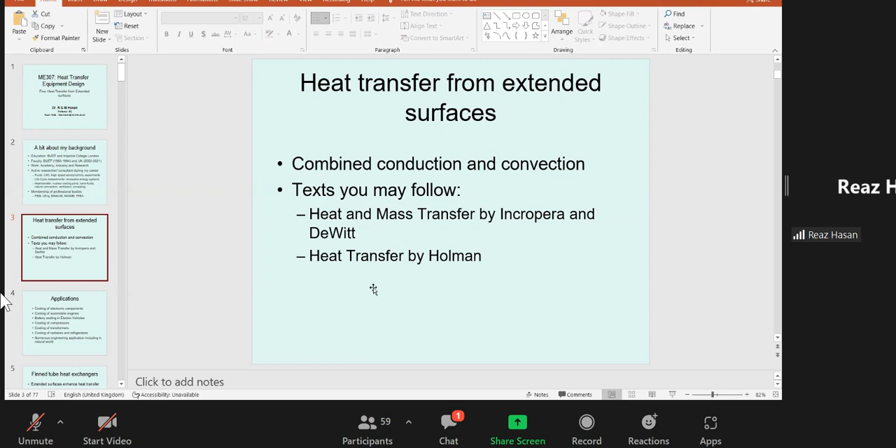আমরা বলেছি যে we will probably spend most of our time about heat transfer from extended surfaces, which means the fins। আমি মোস্টলি হলম্যানের বইটাই ফলো করেছি, বাট ইউ ক্যান ফাইন্ড দিস থিংস ইন এনি টেক্সট বুকস। অ্যাপ্লিকেশনস আর মেনি এবং দিস আর পসিবলি দি নাইসেস্ট এক্সাম্পলস। এবং আজকে আমরা সত্যি সত্যি কিছুটা ক্যালকুলেশন করব ইনভলভিং দিস কাইন্ড অফ প্রবলেম।

So fins are everywhere. Any heat transfer device will possibly have some sort of fins attached to it। আমি রেকর্ডিংটা শুরু করে দিই, তাহলে পরে যদি সময় হয় আমি আপলোড করব, but it all depends on the situation।

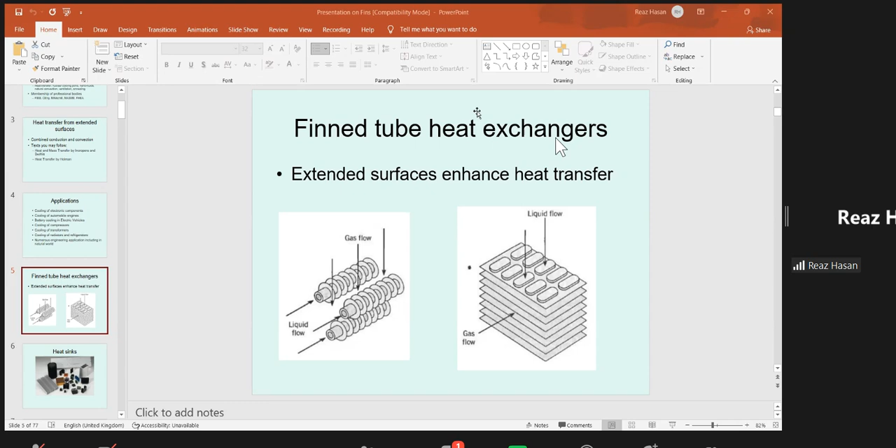Recording in progress. So finned tube heat exchangers are very common. When you go to the laboratory, I would ask you to take a closer look at the things and see whether the fins exist or not. But they are really a common kind of attachment or extension to the design of heat transfer systems.

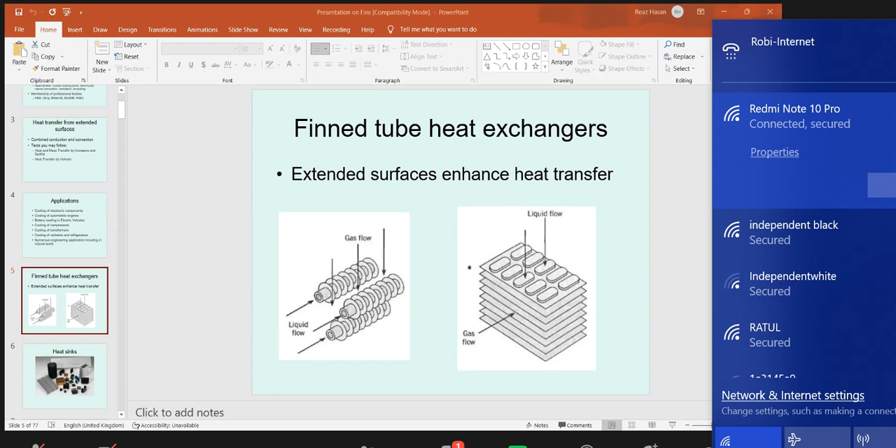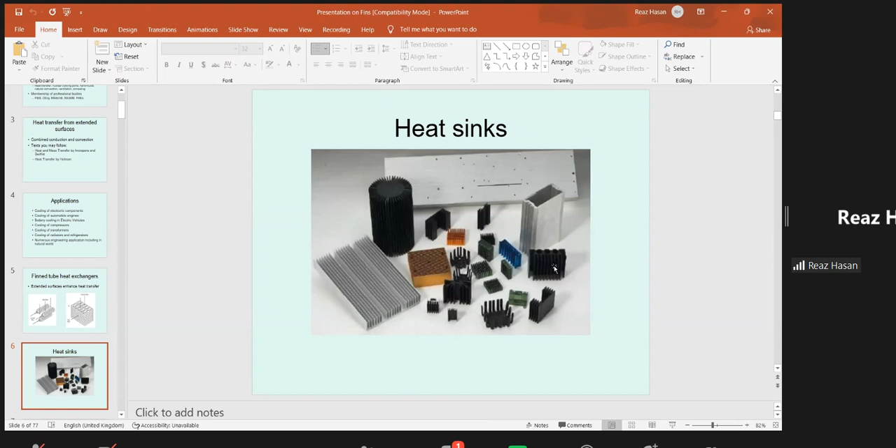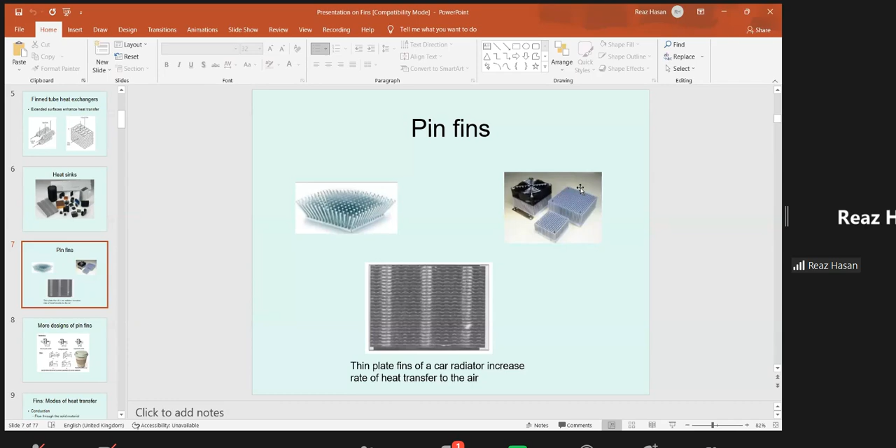On the other hand, the pin fins are like that. It's a protruding pin that can be of uniform cross section, that can be conical, that can be of other different shapes. This is again an interesting thing.

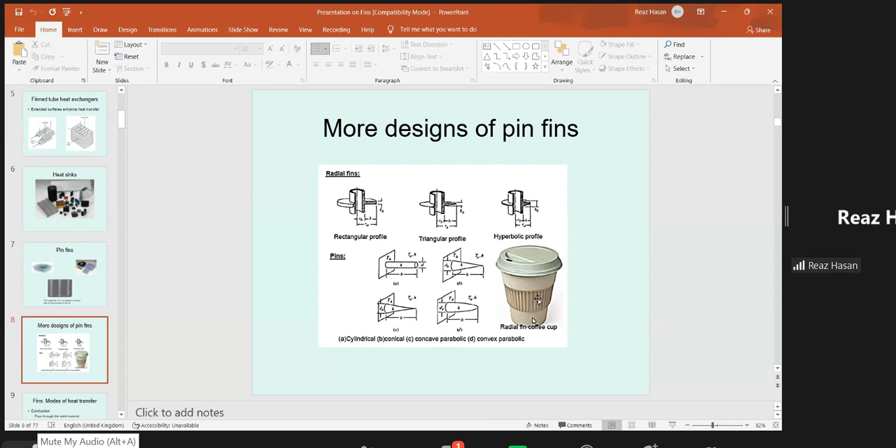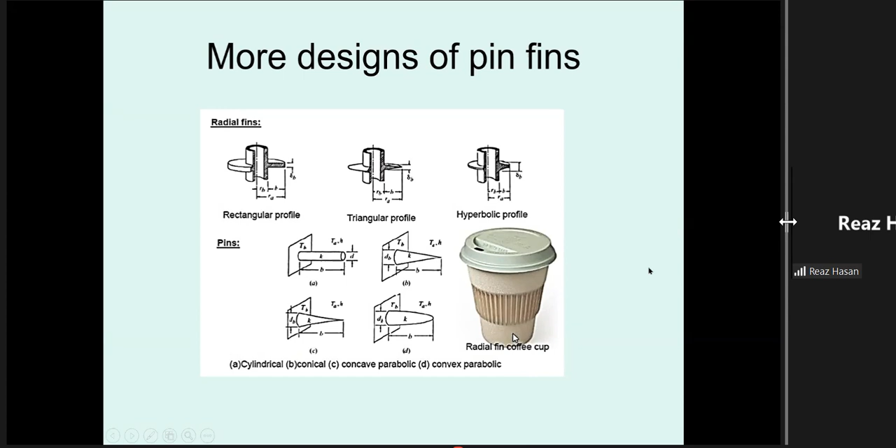So what I wanted to say is when you take a heated cup of coffee or tea, if you hold it at this area you will feel it is very hot. On the other hand, if you feel here, it is much more easier to hold, and at the same time, since it is losing heat, obviously you will feel less hot. Plus, another thing of course, just the very design allows you some space in between the two solid surfaces. So these are again the designer aspects.

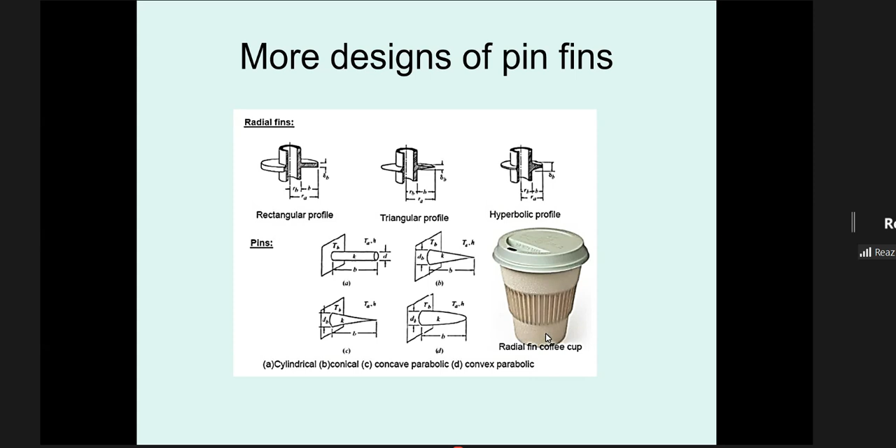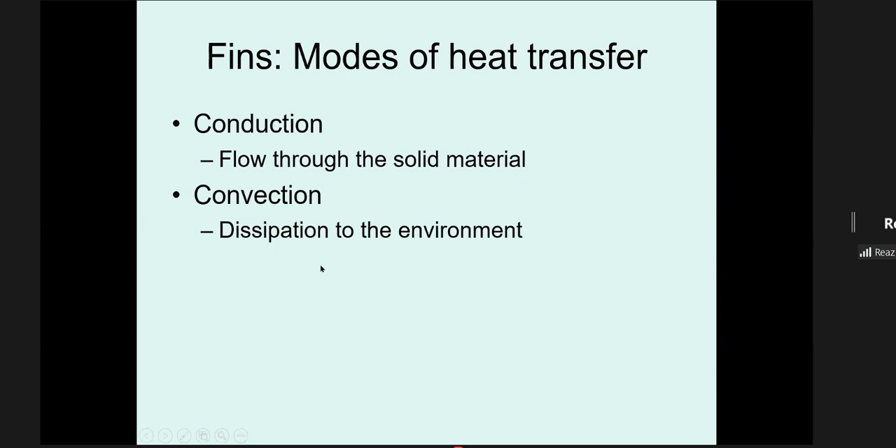So we saw that fins actually represent a combined mode of heat transfer. Here conduction is present, convection is present. Obviously the first bit will be conduction, and all convection actually starts from conduction, which I think you are familiar with from your previous heat transfer course. So it is much more obvious that the majority of the heat that flows from the solid material is via conduction, and then due to the fact that the surface is exposed to the environment, it will start losing heat by convection. So it's a combined mode of heat transfer.

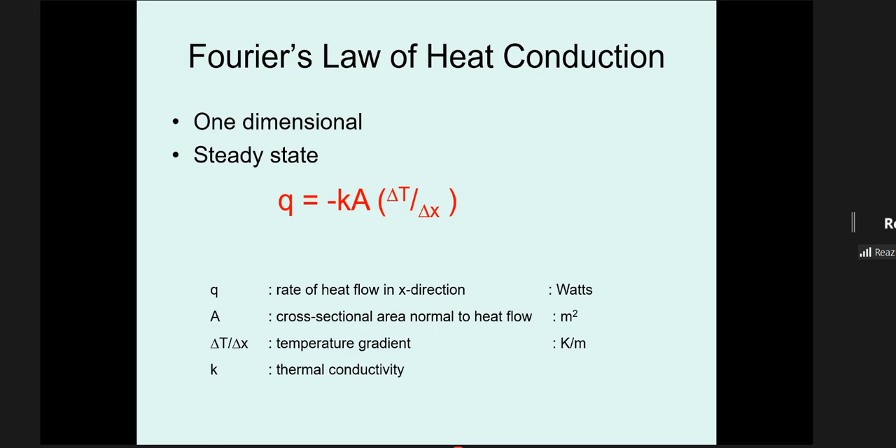In this discussion I just took you through all this basic stuff, so there is really no need to dwell on it if you are more comfortable, but I gave all these things as a matter of completeness. So we can quickly move past these things, there is no need to spend too much time on it.

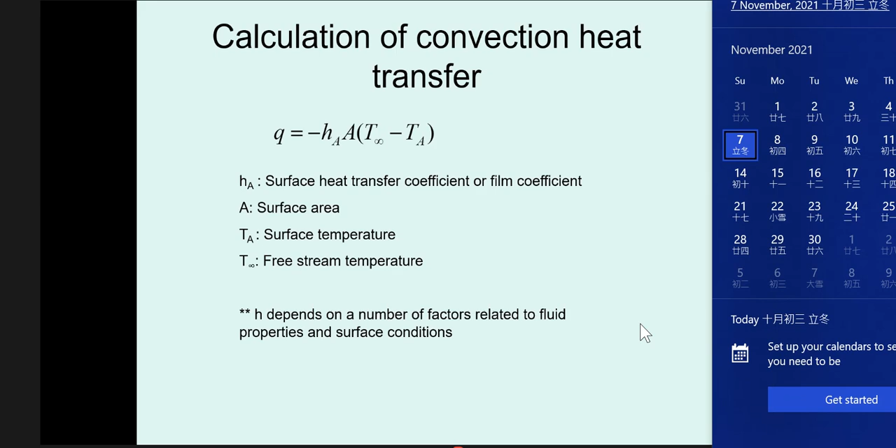And for convection, we discussed that this is basically the equation Q equals H A delta T. And H is the tricky quantity because it is the heat transfer coefficient. I already mentioned to you last week, and I will possibly reiterate a few times in my next classes, that the value of H is very tricky because it depends on so many factors. I showed you a little video last week, and there are plenty available on YouTube and various other places. So H is a tricky quantity, but for the sake of our calculations or all the problems we'll be following, we'll take a given value of H.

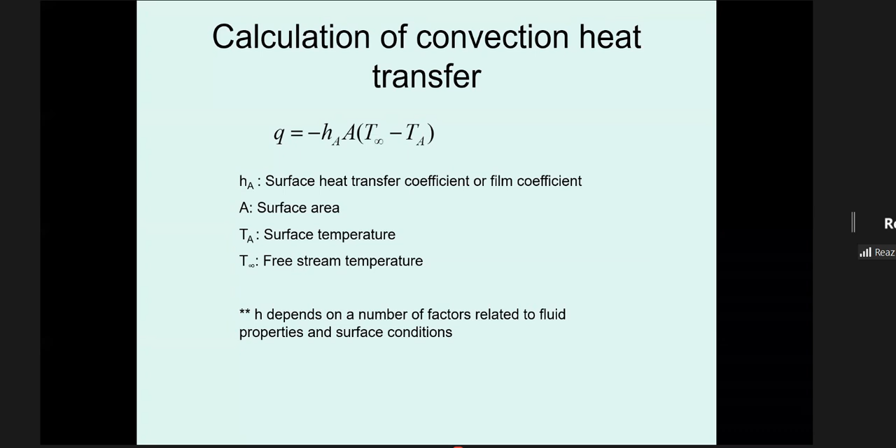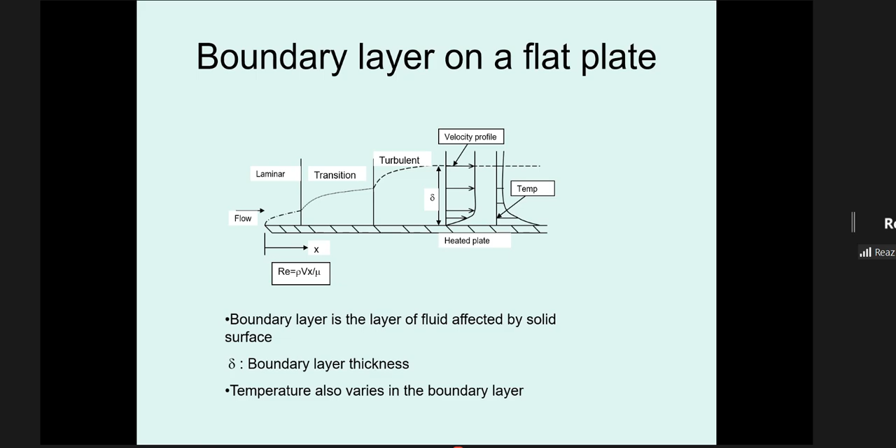And the reason the value of H is a little bit uncertain or tricky to find out is because of the boundary layer which exists very close to the solid surface, and lots of things happen there, and obviously H suffers from a big range of uncertainty. Then we talked about these numbers you are all familiar with: Nusselt number is related to the H value, which is the heat transfer coefficient, and Prandtl number is a ratio of three properties of the fluid in question. Reynolds number, on the other hand, tells us the ratio between inertia force over viscous force. So I think you are all familiar with such things.

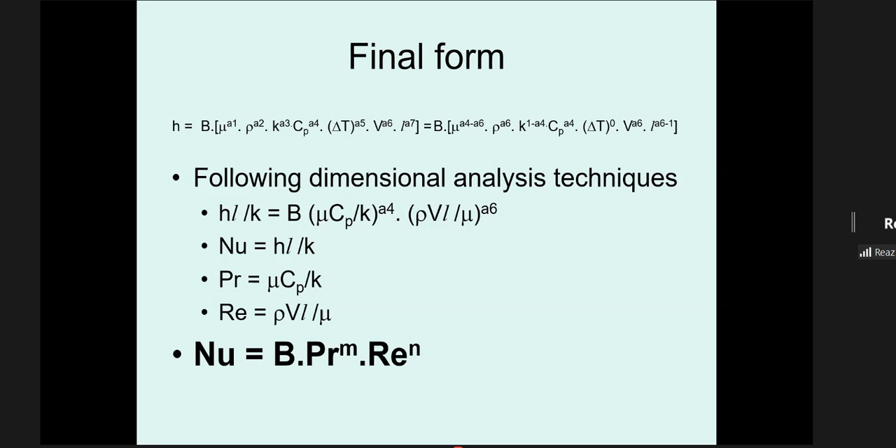And then I gave you one or two examples to try, which I'm sure you should do before next week.

But again, this can also happen to a natural convection scenario. For the case of fins, perhaps natural and forced convection are both equally common, though if I'm correct, natural convection is probably more common, but the other one is also there. In natural convection, basically you've got a heated object and the fluid around it gets heated, and then it flows naturally upward, setting up a flow regime which takes the heat away from the heated surfaces.

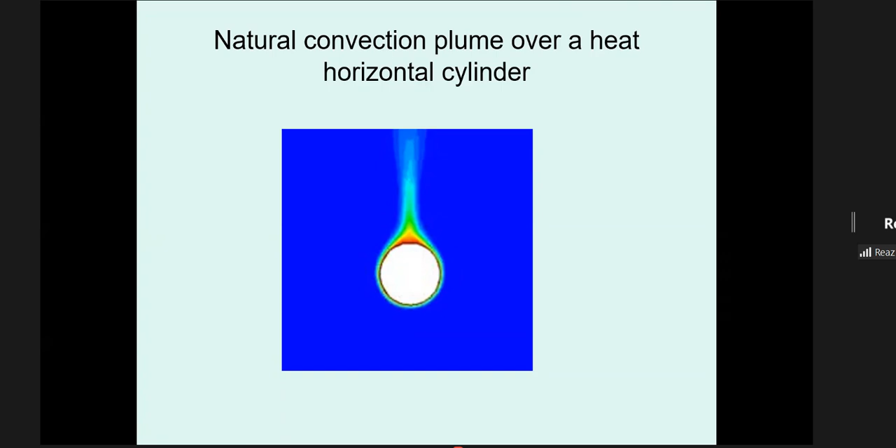The analysis is very similar - we can think about a boundary layer along a vertical wall, and again you come up with a Nusselt number relation. So the Nusselt number and Prandtl number are the same; the only thing different is the Grashof number, which is a little bit messy kind of expression, but this is how it is defined. After we know the Nusselt number, we know the value of H, and then we can solve the conduction-convection problem.

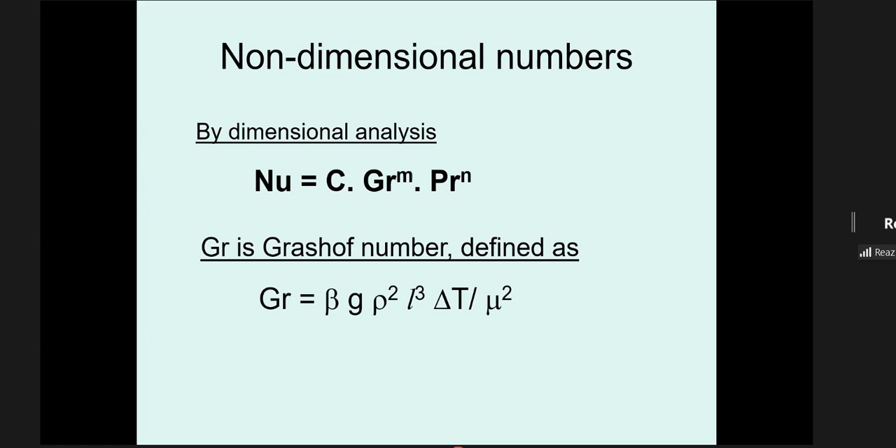One of the best examples is perhaps fins. I gave you a few problems. This is what I suggest to everybody: when you take a heat transfer problem, first look at the problem and then see how you can approach it.

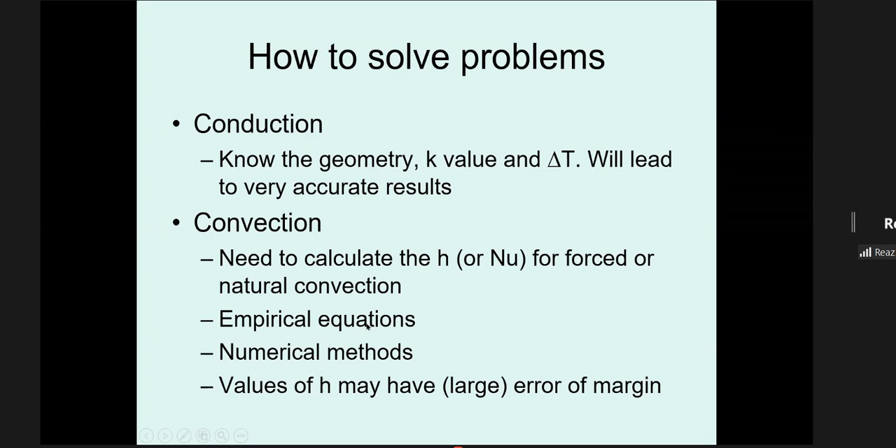In the context of conduction and convection, if you know the geometry, the K value, and the delta T, you can get very accurate results, perhaps exactly the same as what you get in an experiment, whether you do a theoretical or numerical analysis. On the other hand, if you're doing a convection analysis, things can be very different - empirical equations are used and the values of H may have a large margin of error.

So this is what we discussed last week, that this is a standard way of starting the analysis of fins. Here what we have taken - let me see if I can get a better annotation for you.

If I go there. No, I think... I was doing the color. No, I think I better stay with this.

So this is the base metal, base material, which is at a temperature, can be any temperature T0, I've written TB. This is a rectangular fin which is protruding from the surface. At the same time, this is a similar one, but in this case we are considering a circular cross-section, uniform cross-section fin. Here we need to understand that there is a convection environment on top of it.

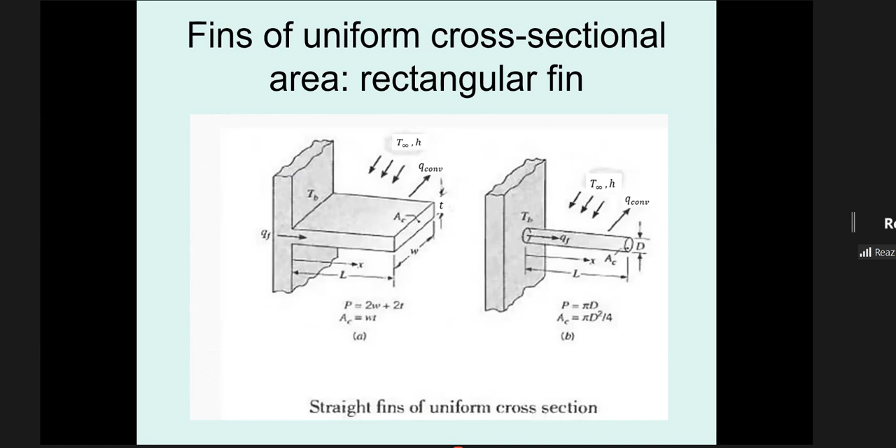We discussed that we can consider it one-dimensional if the depth is very high. One thing to highlight: if there was only conduction - say this is the fin - if it was only conduction, meaning no heat loss by convection, then it would have been a straight linear profile. But the fact that as soon as it comes here there is some loss, dT/dx is not constant, and in fact it decreases. So clearly this makes things a little bit more complicated.

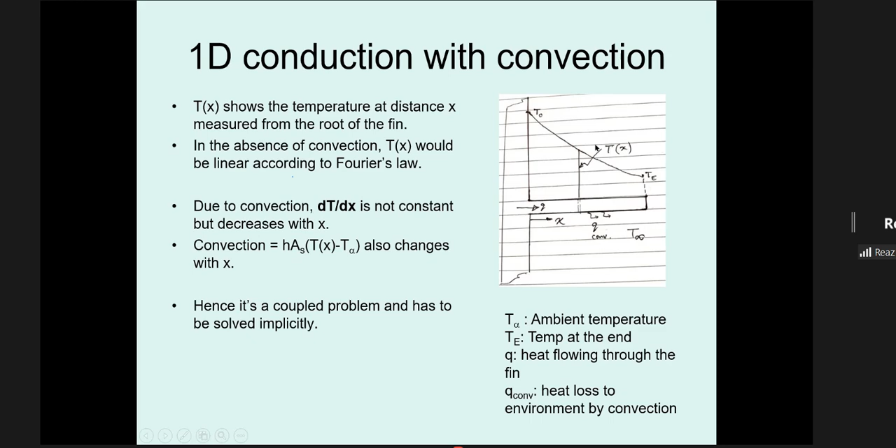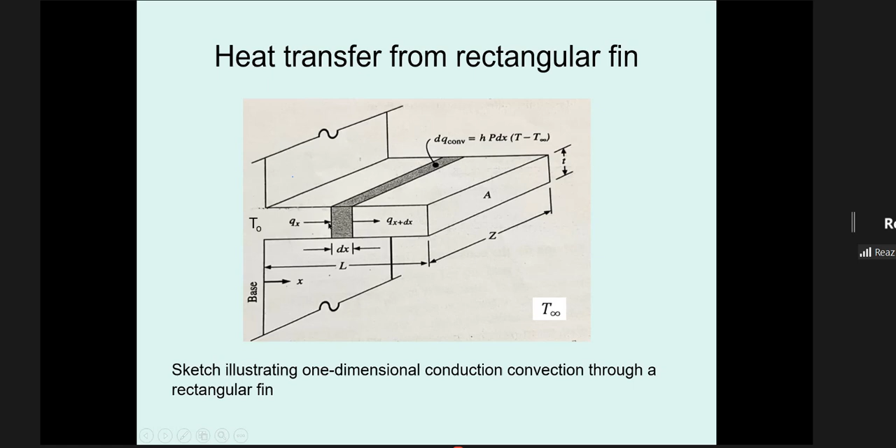And then this is what we did: you take a small elemental area which you are very familiar with, and we say the base temperature is T0, and we take an element at a distance x measured from the base, and this is dx. So our infinitesimal area is P times dx, where P is the perimeter of this area. So P times dx is the area of heat transfer by convection, so dq convection is given as h times area times delta T. And if we consider heat coming in as qx and heat leaving as qx plus dx, then we proceed like that.

So the heat lost by convection is this, and energy in the left face is minus kA dT/dx. That's straightforward, given by Fourier's law of conduction.

The same thing is true. We want to find out the heat lost through the other surface, which is dt/dx at a distance of x plus dx. The way we do it is basically extend it: dt/dx at x plus dx means you write the variable and take the derivative of that times the distance, and then you do that.

Is everyone familiar with this? I hope so, yes. Okay, so the energy lost in convection is this.

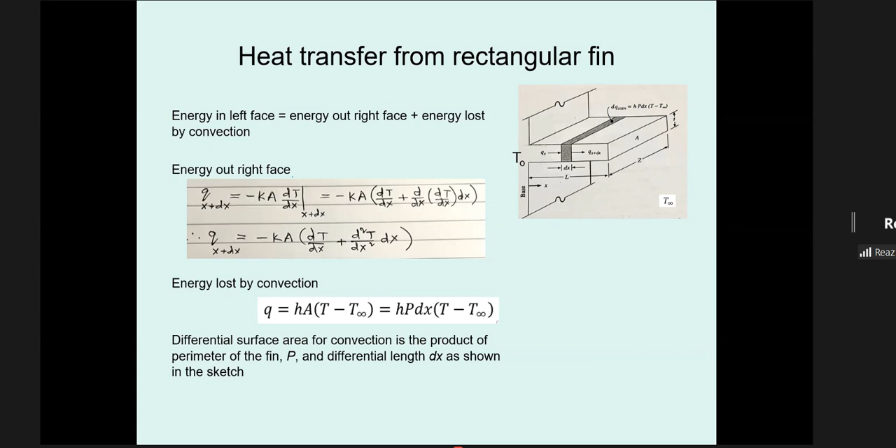Once I'm finished with this, we stop and then start again. Stay on the line. So after that, what we did, we just combined it together, and it needs a bit of doing, and I hope you can do these things very well.

So after combining, you get a second order differential equation in terms of T, which is the temperature. And an interesting quantity that comes up is h times P over kA.

To make it much simpler, what we do is take the excess temperature theta to be equal to T minus T infinity, where T infinity means the temperature of the convection environment or outside environment. So if you put those things in, you can make it even simpler.

I'm sure you are familiar with this kind of second order differential equation. So obviously, since it's a second order differential equation, you need two boundary conditions to solve it.

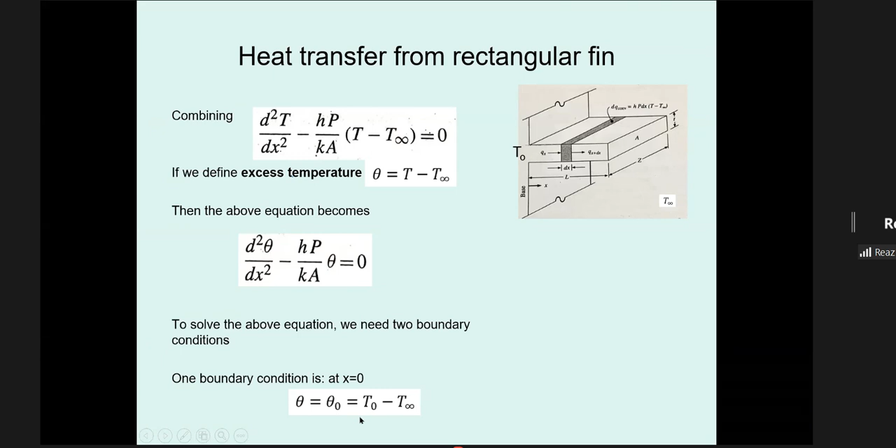One of the boundary conditions is obvious: when you put x equals to 0, which means right at this surface, theta equals theta 0, which is T0 minus T infinity. So that's one of the boundary conditions.

And the next boundary condition can have many different types. I have taken this from Holman, and perhaps these three are normally considered for undergraduate studies.

Case one: we consider the fin to be very, very long, so L tends to infinity, which basically means that at the end, the temperature is the same as T infinity. This is of theoretical interest.

The second case is perhaps more common: the fin is of finite length and it loses heat by convection at the end. I'm sure you agree this is perhaps the most practical kind of scenario.

And the third one is again an interesting one. We are saying that the end of the fin is insulated, so there is no heat loss through the end.

The reason all these three conditions have come up is that when you do mathematical analysis, these three are ones you can typically do. If it becomes too complex, sometimes people have done it, but it becomes a bit more complex. Conceptually it's nothing more complex; it's just that the mathematics, the differential equation solution and expressions, can be a little cumbersome and tedious.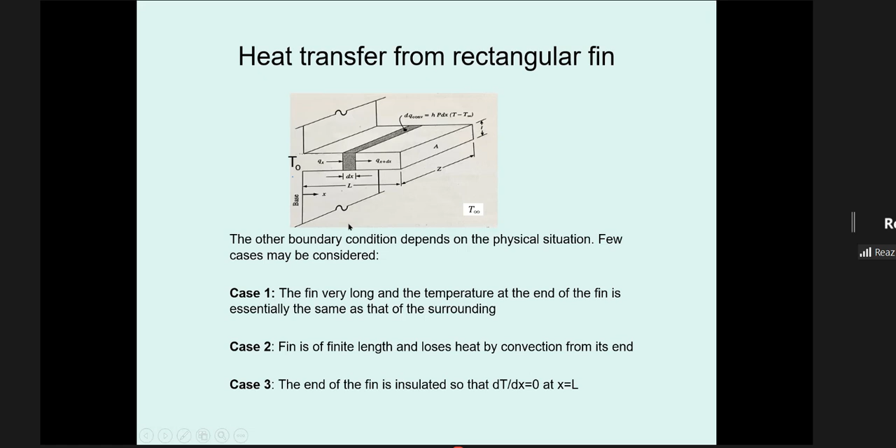The first boundary condition is known: at x equals to 0, you have theta equals theta 0. Now the second boundary condition is that we apply theta equals to 0, because by the time it goes to infinite length, at x equals to infinity, your theta equals to 0.

So you put all those things in and solve it straightforwardly, and you come to this expression: theta over theta 0 is given as e to the power minus mx. And as expected, this is actually giving us the temperature variation over the fin.

I think you are all familiar with the case that when we study heat transfer analysis, if we know the temperature distribution, we can always calculate the heat transfer. Ultimately, for most cases, we are more interested in perhaps the value of the heat transfer. We are also interested in the temperature, obviously, but perhaps Q becomes the more important thing to determine in many cases.

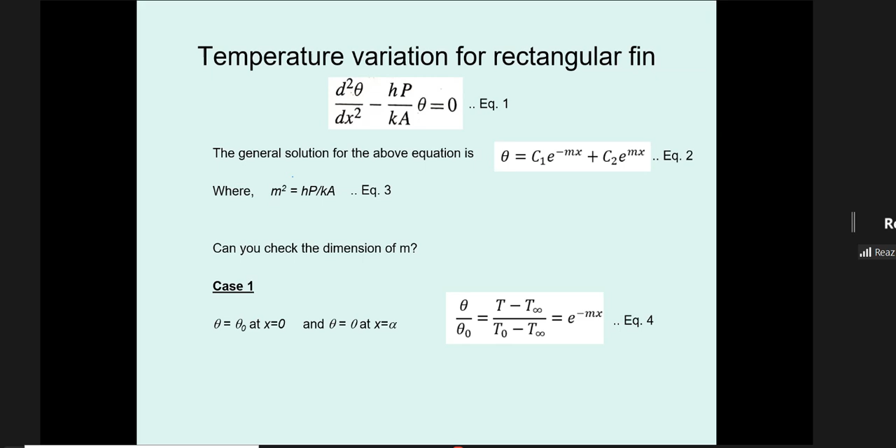So that's H P over K. So that's watt per meter squared. I write Kelvin. Then, so this is it.

Next comes P, the perimeter. What would be the dimension of perimeter? Meter, yes sir - it's just a distance. Then that's divided by watt per meter Kelvin, that's the dimension of K. And I put a second bracket because otherwise it can be confusing.

So what we can see is that a parameter has come up which is given by equation 3, and this parameter appears in all the following equations, so it's better to get an appreciation of it. M is not a non-dimensional quantity, it's a parameter which has got a dimension of inverse length. And perhaps somehow it can be shown that there is some sort of ratio between the convection effect and the conduction effect. I'm not going into any more details.

So if you know this, you can actually work out the heat transfer, the temperature variation along the fin for this case, for case 1.

So let's go to the other cases. The second case of finite dimension. Let me remind ourselves what are the two cases. Case 2 is a fin of finite length that loses heat by convection from its end. This is perhaps the most common one.

But since the analysis for that is a little bit cumbersome, all the books will start with case 3 first. Case 3 says the end of the fin is insulated, so there is no heat transfer through this end. That means dt/dx equals 0 at x equals L. Let's derive the expression for that first. So this is our case 3.

In case 3, we have d squared theta by dx squared, this is our original differential equation derived from the basics, and this is the solution in the form of C1 and C2, and we now know how we can find out the value of m.

Now if we apply the case 3 boundary condition, let's see what it becomes. In case 3 we assume the end of the fin is insulated so that dt/dx equals 0, which basically means d(theta)/dx equals 0. So you can differentiate this expression, and then we get two algebraic equations.

This one comes from substituting the first boundary condition, theta equals theta 0 at x equals 0, so you get c1 plus c2. The second one comes by substituting the other condition: you differentiate the whole thing, substitute x equals L, and you get that expression.

Have you used hyperbolic functions in any engineering application in any subject yet? Can somebody tell me? No sir? You probably haven't used it, and I don't think I had either, unless you went into vibration or somewhat more complex scenarios - hyperbolic functions don't usually come up.

But this is an ideal example of why we do so much mathematics in engineering, because when you get an expression like this, it's not a very nice expression. On the other hand, if you can express it in the form of sine and cos - well, not exactly sine and cos, we call it sine hyperbolic - and we used to say cos and sine before. It's up to you how you remember the variation.

So here what you get is that theta over theta 0 comes out like this. You'll see on all your calculators that there's a hyperbolic function: cos hyperbolic, sine hyperbolic, tan hyperbolic. So again, like before, theta over theta 0 gives the temperature variation along different x values.

Now, as I told you before, whenever you derive an equation, the first thing you should check is whether the boundary conditions make sense. For case 3, the boundary condition was at x equals 0, theta equals theta 0. Can we remember that? At x equals 0, theta equals theta 0.

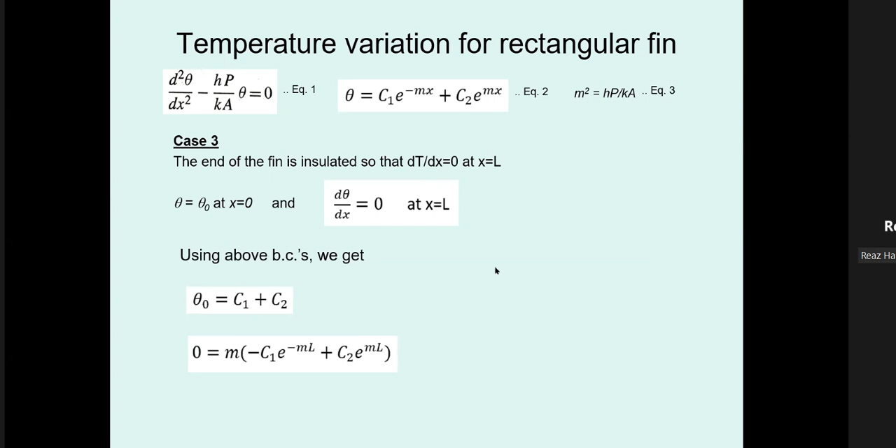It's not so straightforward, because in this case it's dt/dx equals 0. But you can show that too, if I clarify: for example, at x equals L, d(theta)/dx equals 0 must hold. So if you differentiate this quantity and then put x equals L, I'm sure you'll arrive at this condition. Is this clear to all of you?

Okay, so this is how I look at things, because equations can be messy, can be complicated, but these things have all been done by people more than 100 years ago. I don't see any reason really remembering every single thing. You may have to remember some of these, but having an appreciation of these equations and the meaning of it is perhaps more important from practical considerations.

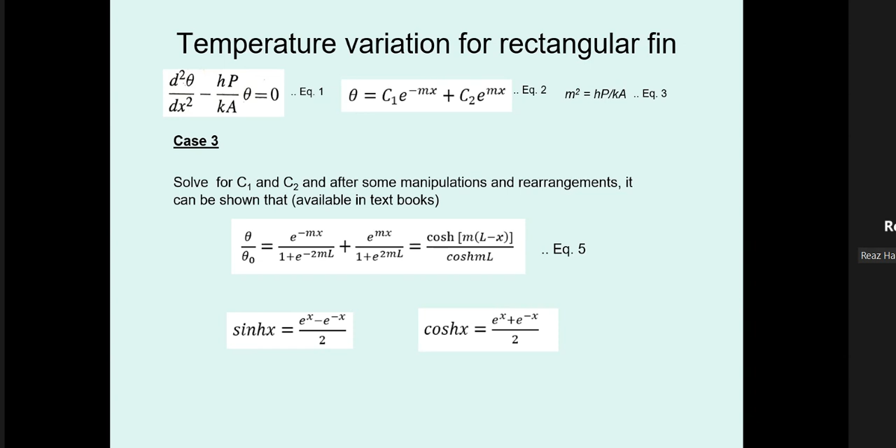So this is case 3. Now we have skipped case 2 simply for this reason. Case 2 is that the fin is of finite length and it loses heat by convection from the end. In this case, the calculations become a little bit messy.

After substantial algebra and manipulations, this is luckily done in Incropera and DeWitt, so I'm sure you can have a look. You can also find it in many internet websites, reliable websites. These are all done there. I didn't really see much point going through all of the different steps with you because ultimately it adds nothing to your knowledge apart from a little bit of how you do the rearrangement and manipulations.

So at the end of the day, once you have done it, you come up with equation 6. And in equation 6, what we see, again, it is telling the story in exactly the same way. What it is telling is theta, how it varies with x. In this case, there is some additional term coming, h over mk, sinh m times L minus x.

The lower part is completely fixed, the upper part is a variable of x. We cannot say it's a linear variation - of course not, it's a hyperbolic variation. But again, if we put the numbers there, we all have mighty calculators these days. You can always find out the temperature variation for this kind of thing.

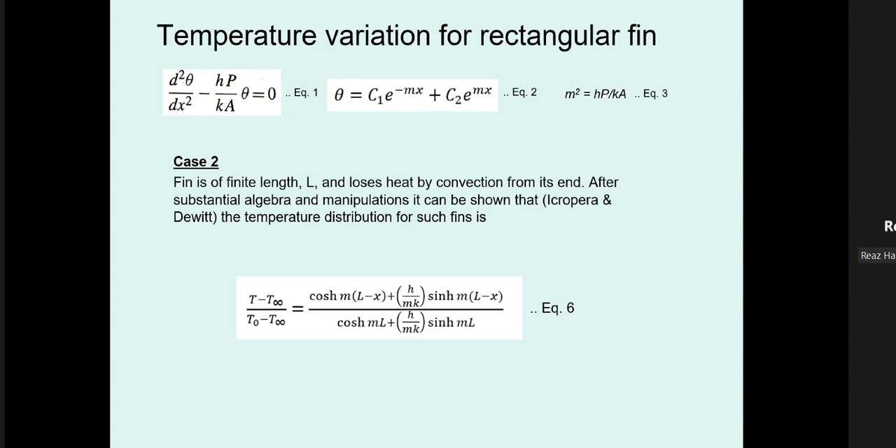Any question at this stage? Okay, I'm assuming you are all comfortable with that.

So let's take an audit of the whole thing that we have done, because if we put the things together, we can start seeing the differences very easily. If we look at case 1, which is the straightforward one, I call it equation 4 for my case - the fin of infinite length. The second one is the fin is of finite length with convection all along, including at the tip. In other words, the fin is submerged in a convection environment which has got an ambient temperature of T infinity. This is certainly, you will all agree, a very realistic scenario for all applications.

And in this case we see equation 5 is perhaps the most complex, and the last one is insulated tip of finite fin. It is not as simple as equation 4, but this is again a much more doable thing for practical reasons. So in any case, we have found out the temperature variation of the fin along the distance x for 3 different conditions.

There are more than 3 conditions - I think Incropera puts 4 conditions. I'm sure the researchers have found out other different things, but for practical reasons, perhaps what you need is case 3 equations with some modifications, which I'll show you later on.

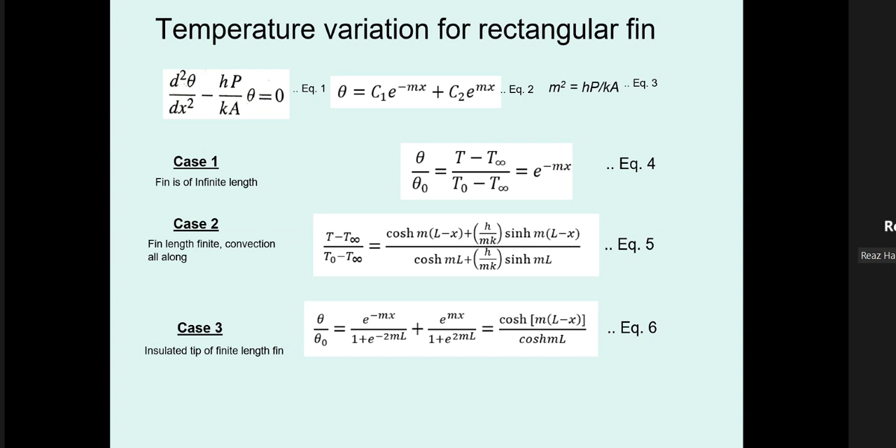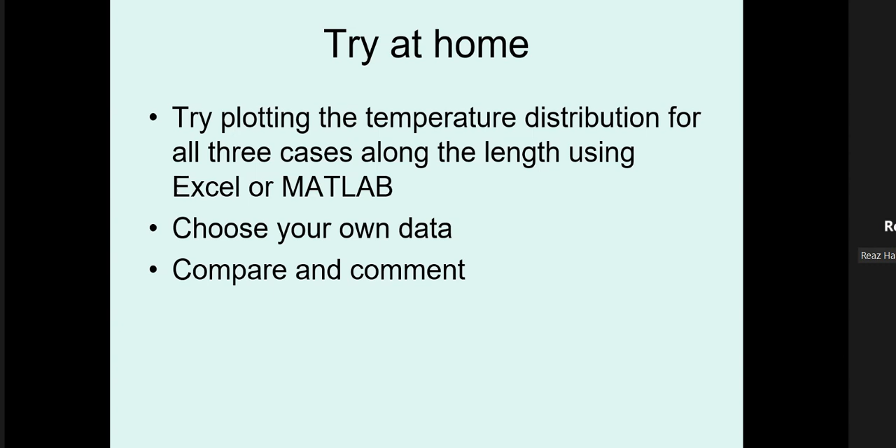You just program this equation in your Excel spreadsheet or MATLAB spreadsheet, or use other available spreadsheets. Then you substitute different X conditions, extract a certain number of data, and plot it on top of each other. You can see how the boundary conditions are affecting the temperature variation along the length for the same material, same cross section. আমার কথাগুলো ক্লিয়ার হয়েছে তোমাদের? জি স্যার। Okay, so I would strongly suggest you do it at least once, then you will start to enjoy the subject.

আমাদের এইটুকু গেল temperature variation. The next thing is heat transfer from rectangular fin. তোমরা যদি নেক্সট ক্লাসে এগুলো করে থাকো, feel free to show me during the class, or just draw a figure and send me by email. Then I can show it to all the rest of the class. Okay, and that's how we really go deeper and enjoy the whole thing.

আমরা যখন টেম্পারেচার বের করলাম, এরপরে আমাদের প্রয়োজন এখান থেকে কতটুকু হিট লস হচ্ছে তা বের করা। So we want to go for heat transfer. So আমরা সবাই জানি যে if it is so, this is all of the heat loss. This is quite interesting, and I think this is the most interesting thing. এখান থেকে যতটুকু হিট লস হচ্ছে, no matter what's the boundary condition, ultimately the heat is flowing through this little area - the base area A at x equals to 0. এই area দিয়ে যতটুকু হিট কন্ডাকশনে পাস হচ্ছে, that is the total heat which is actually lost through the fin.

Think about it a little bit, ponder over what I've just said. If more heat goes from here, ultimately where is it coming from? The heat is coming through this cross section at x equals to 0. Are you all comfortable with that?

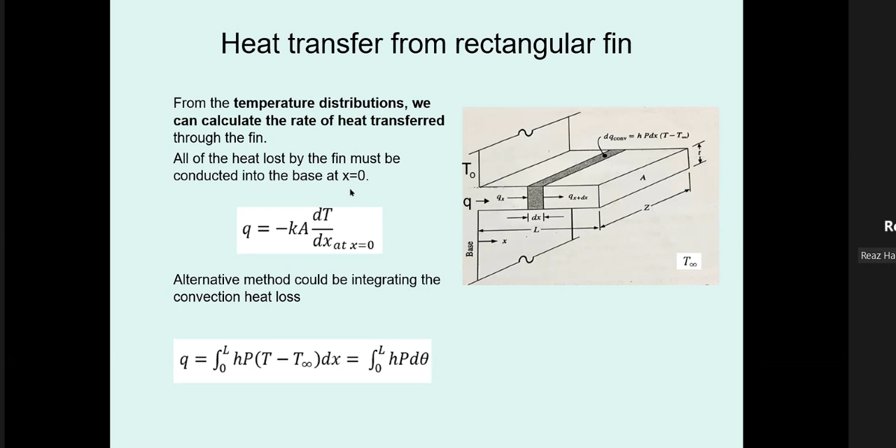And if this is done for all three cases, we know the equations of heat transfer, equations 4, 5, and 6. If you differentiate dt/dx and put in the boundary conditions, you get three equations for heat transfer. For case 1, fin of infinite length, Q is given by the square root of HPKA theta 0. This is the heat loss when the fin is of infinite length. So this is case 1.

For case 2, again you do dt/dx and put x equals to 0. Quite interesting: HPKA, T0 minus T infinity is basically theta 0, isn't it? I should have written theta 0 here, I don't know why I wrote this. So Q equals to this, which is the same.

Then you get a factor coming in, and that factor reflects the temperature variation equation for the second case. And for case 3, again you get the same number, square root of HPKA, with this theta 0. So HPKA theta 0 is the same for all three cases, and for infinite length, this is it.

If it is a fin of finite length but insulated tip, it's a little simpler: you only have tan hyperbolic of m times L. When it becomes the most common case, the expression is slightly more complex, but in terms of physics, there is nothing new. So if you know these things, you can find out Q and the temperature variation. Any quick question at this stage?

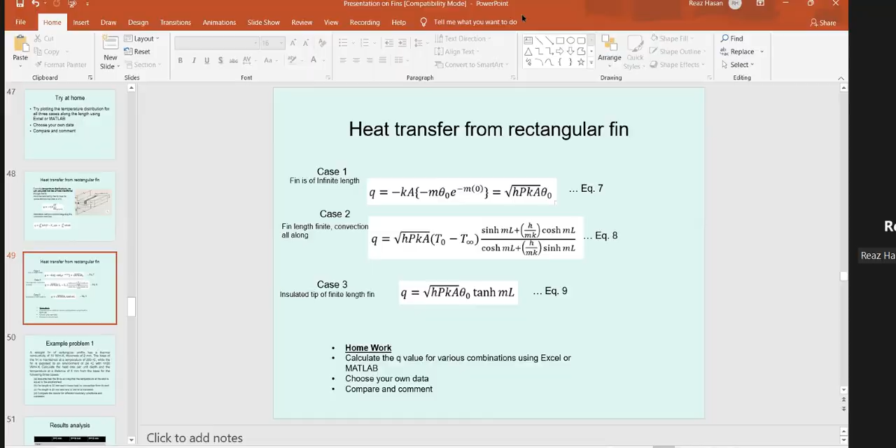First I need to unshare that, and then I go to the option of the whiteboard. Later, I have to have the whiteboard. Mute. The whiteboard to ব্যবহার করেছি, so somehow okay, all right, let's see. Okay. And not this one. How do I go to the whiteboard? No, I'm sorry, I forgot how to start the whiteboard. Let me use করেছি already একবার. Oh yes, I can go to the whiteboard now.

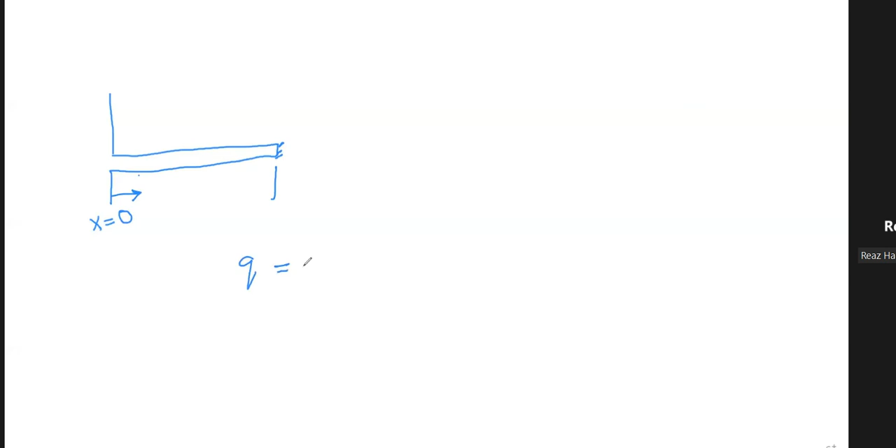যখন আমরা ইনসুলেটেড টিপ বলতে চাচ্ছি, that means there is no heat transfer to this end. So এটাকে আমরা বলতে পারি যে এই জায়গায় at the very end heat transfer কখনো হবে না। Heat transfer is always given by Q equals to minus KA times dt/dx. এখানে তোমরা যদি ইকুয়েশনটাতে দেখো, A can never be 0, K can never be 0. So for Q equals to 0, that implies dt/dx must be 0.

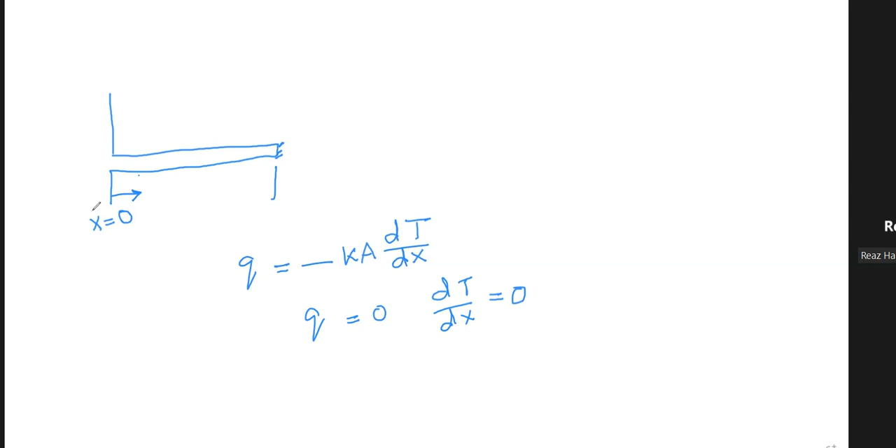Okay, so what is the insulated situation? Insulated situation means Q equals to 0, which automatically implies dt/dx equals to 0. In other words, for this case, the temperature variation would be such that towards the very end, you get a variation. So it becomes a situation very, very close to the end, it must be parallel to the x-axis, so that your dt/dx at this position is taken to be equal to 0. Is that clear? Yes, sir.

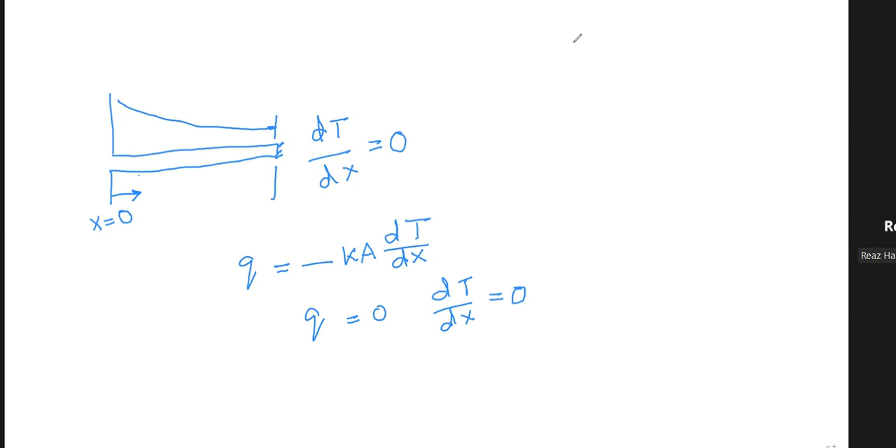Okay, thank you. Oh, I've done very well. আমার প্রথম এটা আমি ব্যবহার করলাম, so I'm very pleased. Okay, so we go back to where we were before. The whiteboardটাকে আমি cancel করছি, so I start again. So I share the screen and go back to my presentation.

এখানে আমরা বলেছিলাম, so this is a very, very useful comparison, and this is why I really avoided deriving all these things, because you can do these things yourself. Just read it when you have time. So basically, we can look at equation 7, equation 8, and equation 9. And if you look at it carefully, equation 7, square root of HPKA times theta 0 is essentially...

আমি আবার 10 মিনিট পরে কাট অফ হয়ে যাব, then I will start। So এখানে আসার পরে equation 7 এ তুমি পাচ্ছ এটা, and all the other equations basically have this whole bit plus some other functions staying in. For case 2 it is a little bit more complicated, for case 3 slightly complicated.

So again, similar to my previous suggestion, I would ask you all to do these things by yourself. Calculate the Q values for various combinations using Excel or MATLAB. Choose your own data, compare and comment. Okay, does that make sense?

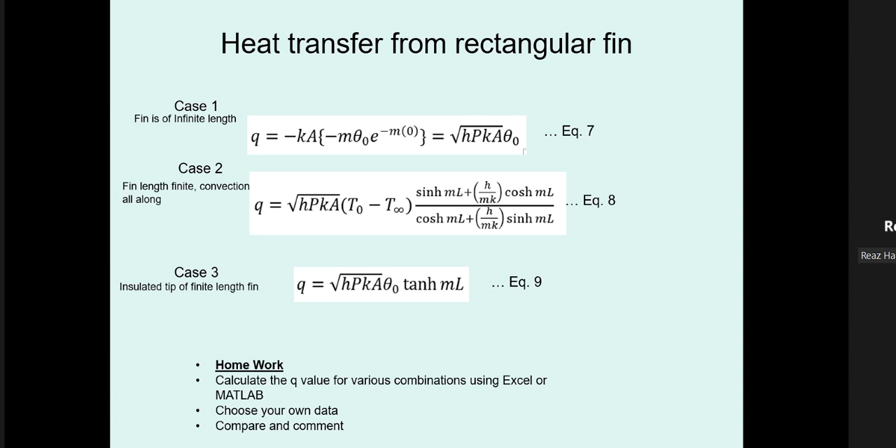আমাদের পরীক্ষার যে প্রশ্ন থাকবে, obviously some of them will need your doing the things by yourself। আমি তোমাদেরকে যে ১০০টা অঙ্ক করতে বলবো তা না, but obviously I will check your inner understanding of the things, and those understandings are only possible if you do some work by yourself। শুধুমাত্র বইতে যেটা আছে সেটা পড়লে সবসময় হয় না, you need to just use your own thinking। এবং I will always try to set questions which will try to check those who have worked better। All right? So I'm sure you should all be able to do these things.

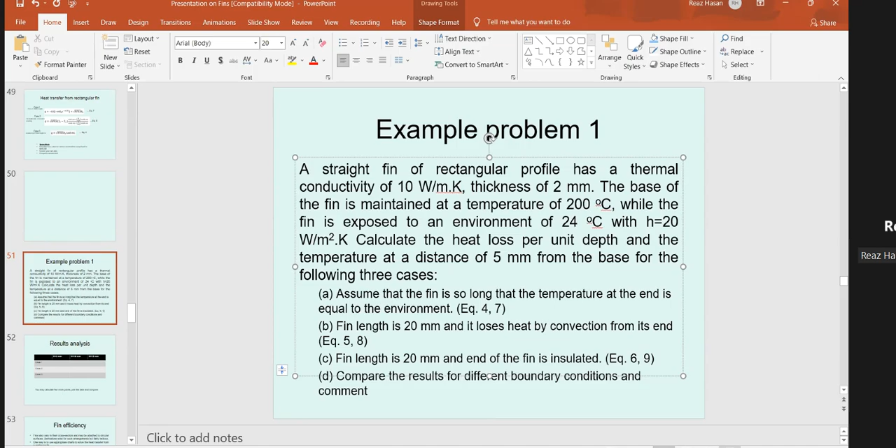আমি এটাকে একটু ছোট করে লিখতে থাকি, তাহলে তোমাদের আরেকটু সুবিধা হবে। প্রথম অংশটার জন্য তোমাদের দরকার হবে ইকুয়েশন 4 and 7, পরেরটার জন্য দরকার হবে ইকুয়েশন 5 and 8। আমি একটু পরে শুরু করলে ইকুয়েশনগুলো দেখার সুযোগ দেব। সরি, এটা হবে equation 5 and 8, আর এটা হবে equation 6 and 9, case 3, equation 6 and 9। তোমরা এই ইনফরমেশনটুকু এখন লিখে নিতে পারো, আমি ফিরে আসার পর ইকুয়েশনগুলো আবার লিখতে দেখাবো।

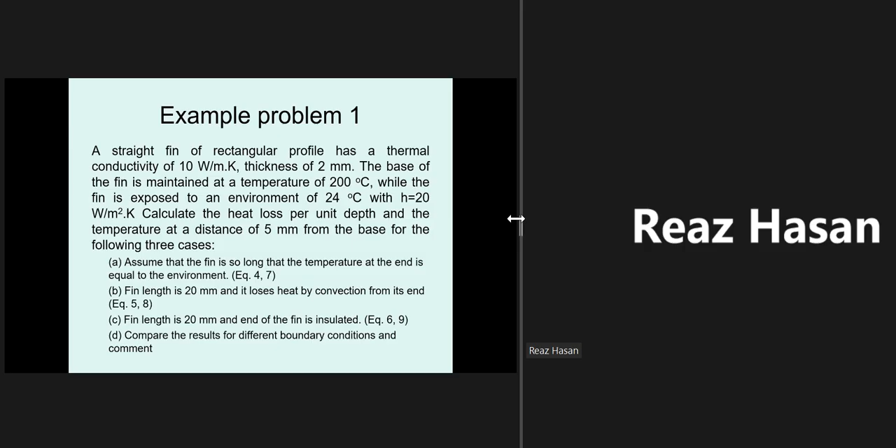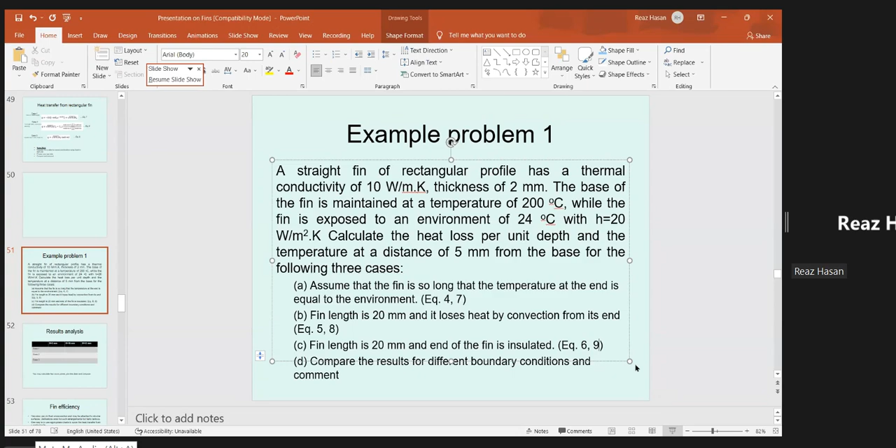আমার স্লাইড... ওকে, থ্যাংক ইউ। এখন আমি তোমাদেরকে ওই ইকুয়েশন 4, 5, 6, 7, 8, 9 নিয়ে যাচ্ছি। So you can now copy those, and then probably it will be much more meaningful what I've just said। তাহলে তোমরা quickly equation 4, 5, and 6 কপি করো carefully।

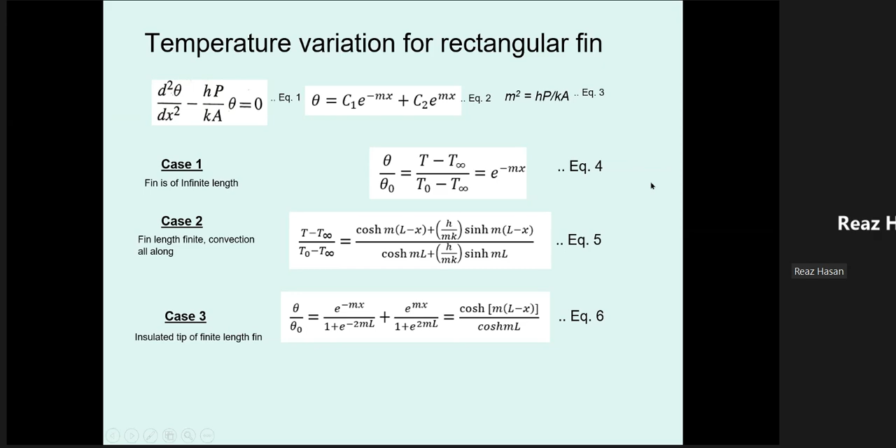Okay, so I'm assuming তোমরা সবাই এই temperature variation গুলো লিখেছো, এবং these are for 3 different cases, case 1, case 2, case 3। এই তিনটা কেসই বেশি কমন, এবং case 2 perhaps more realistic scenario। আমরা যে ফিন বানাই তা infinite length থাকে না, and in most cases it is not an insulated tip। Okay, so case 2 is more common, but unfortunately case 2 calculations involve a little bit more cumbersome expression, but there are practical ways out for this যেগুলো আমরা পরের ক্লাসে ডিসকাস করব।

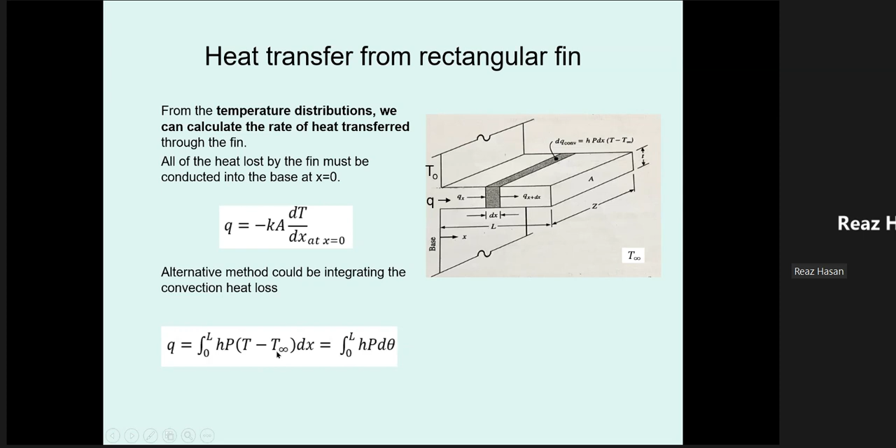তারপরে যেটা দরকার হচ্ছে সেটা এটা, আমি জাস্ট এই ইকুয়েশনটা, আমার ভুলটা হয়েছে এখানে, এটা হবে hp theta dx, তো আমার টাইপিং এ যে ভুল হয়েছে সেটা আমি কারেক্ট করে দেব, it should be hp theta then dx। Okay, so can you all copy these 3 equations please, equations 7, 8 and 9.

আগেরগুলো ছিল টেম্পারেচার ভ্যারিয়েশন 3 ধরনের ফিনের জন্য, case 1, case 2, case 3। That was a temperature variation, but in this case it is the heat transfer Q। হ্যাঁ, এটা rectangular অথবা circular fin এর জন্য চলবে, যেটার uniform cross section। আমরা যেহেতু rectangular করেছি আমরা লিখেছি, তারপরে দেখবে there are so many equations you will be overwhelmed, but there are ways to avoid it, so don't worry with complicated expressions।

হ্যাঁ, থিটা জিরোটা রুটের বাইরে। সো HPKA এইটুকু হচ্ছে স্কয়ার রুটের মধ্যে আর থিটা জিরোটা বাইরে।

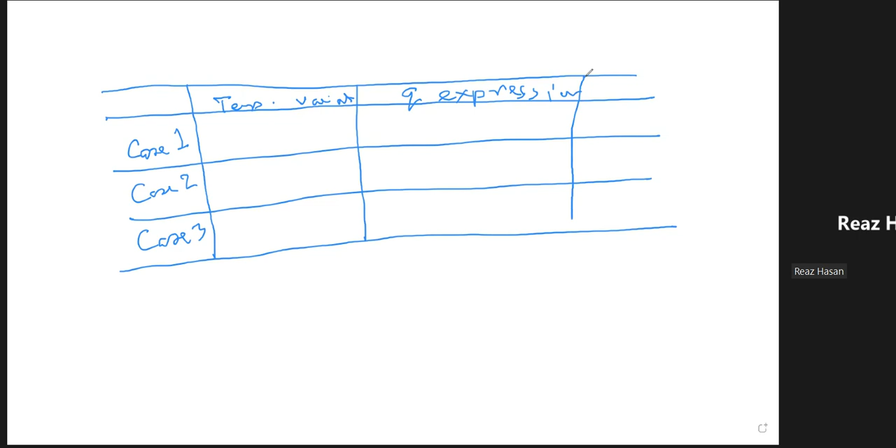সো প্রথম সেট অফ এক্সপ্রেশনস এ তোমরা লিখবে টেম্পারেচার ভ্যারিয়েশন। তোমরা যেটা কপি করেছো ওইটাকে আবার তোমরা সুন্দর করে যদি লিখে ফেলো, and then you write down the Q expression। Okay, আর এর সাথে তোমাদের দরকার হবে to write down what is the value of the M.

So M is square root of HP over KA. Job is done। তো তোমরা যখন এইটুকু করবে, and if you write down these expressions which you have already done, but if you put them nicely in these fashions, okay, you will see two kinds of similarity। One similarity along the row, যে এটার সঙ্গে এটার একটা মিল আছে, and another similarity in the vertical direction।

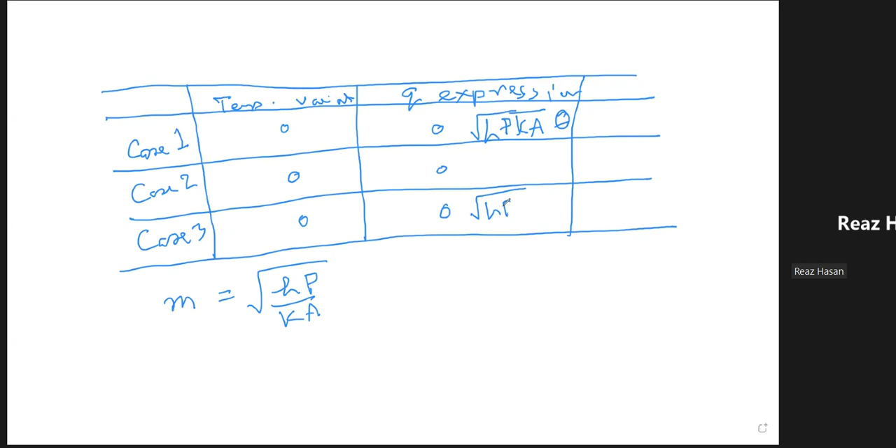That as you move from case 1 to case 3, you can see that there are some terms, যেমন আমার নিজেরই এখন মনে পড়ছে, যদিও বহু বছর পরে আমি এটা পড়াচ্ছি, HPKA প্রথমটার জন্য this is theta 0, এবং পরেরটার জন্য HPKA you have got the same thing, KA, and you have got tan hyperbolic ML. Okay, and the middle one is slightly more complicated।

So you have got similarity along the column, along that, and at the same time, there is some interesting, in terms of complication, there is some similarity in that direction।

এগুলো আমি বলছি কি কারণে জানো? এগুলো বলছি যে যখন তোমরা প্রবলেমগুলো ইউজ করতে যাবে তখন দেখবে যে if you remember things in this fashion, remembering is never too torturing। Okay, although I'm not too sure whether I'll ask you to remember all, but again, having these kind of conceptual inner understanding will allow you to work through these problems very easily।

So ঠিক আছে, এখন আমরা আবার আমাদের এই প্রবলেমে চলে যাই। We now have all the information needed, and then we can go for straight away our problem that we were really, what happened to my, কোথায় গেল?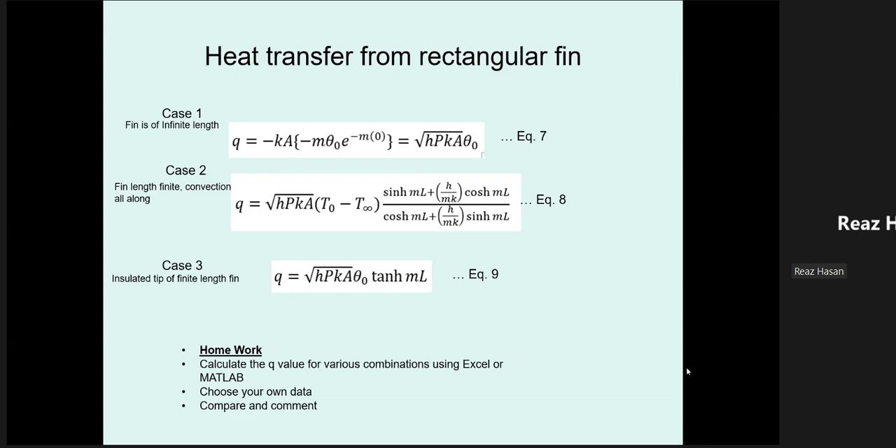Yes sir. Okay, so now we move to our problem, because we were discussing this problem. This is the problem we talked about, and now we are fully equipped to solve it.

Here we have the h value given, we have the k value, and we have the thickness value as well. And we said we want to find out the answer at a distance of 5 millimeter and per unit depth. So your z is also known. So that's all you need basically, because the length would be variable.

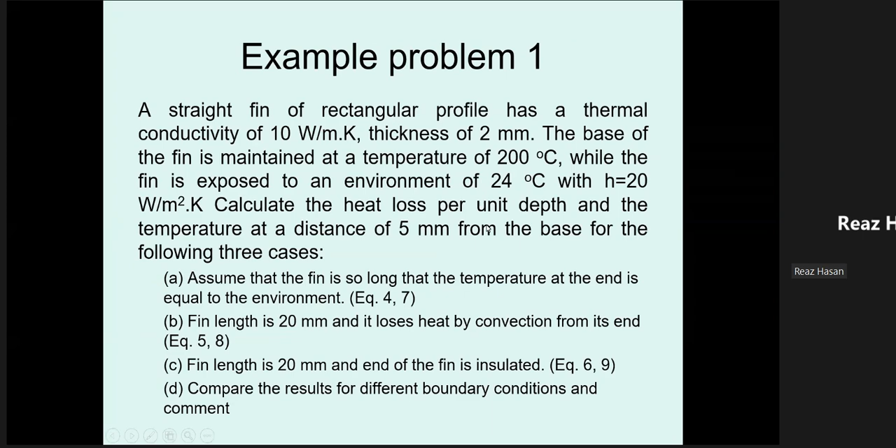I won't do the rest of this part myself. I just want you to use your equations which you have. Can I ask you all to do at least some parts given the time we have?

First, for x equals to 5 millimeter, can you work out case 1, case 2 and case 3 please? You will need the calculation of the m value first. Okay, first calculate m, and when calculating m you will see there's a bit of complication, right?

The expression for m is square root of H P over K A. H is given to you, H is 20, K is 10. These quantities are known, so you need to first find out the P value.

P is the perimeter, which is 2T plus 2Z.

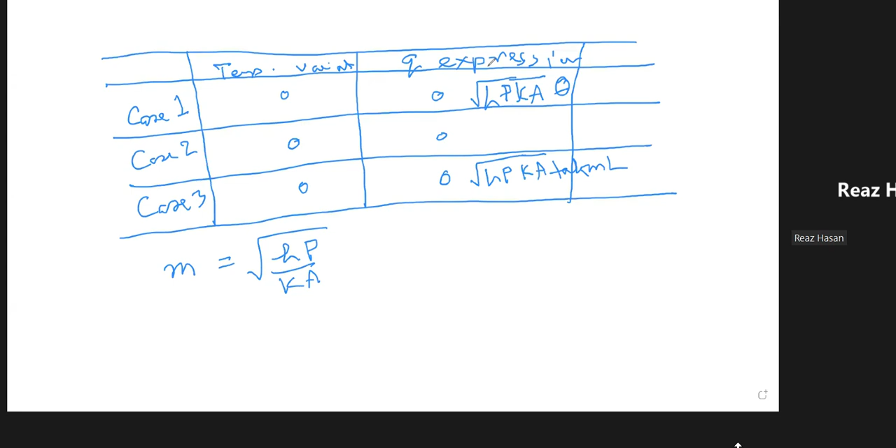So the first thing you need to do is calculate your m value. So m equals to... okay, I think I need the eraser.

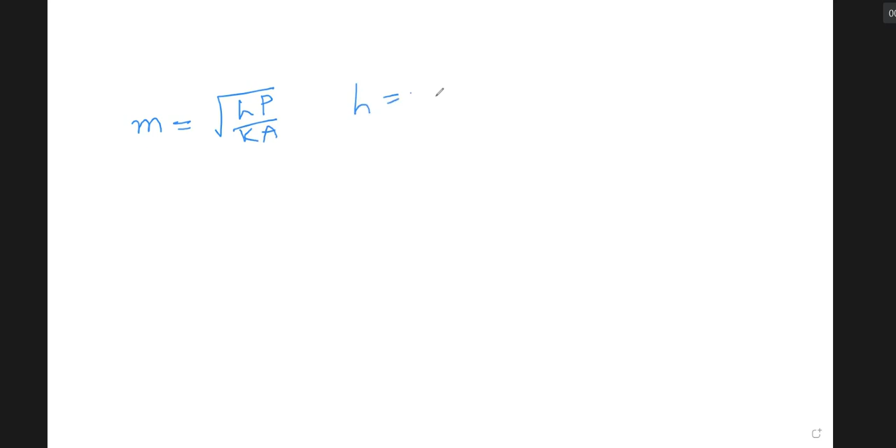Square root of H P over K A. We know the H value, H is given as 20, K is given as 10, and what is the perimeter?

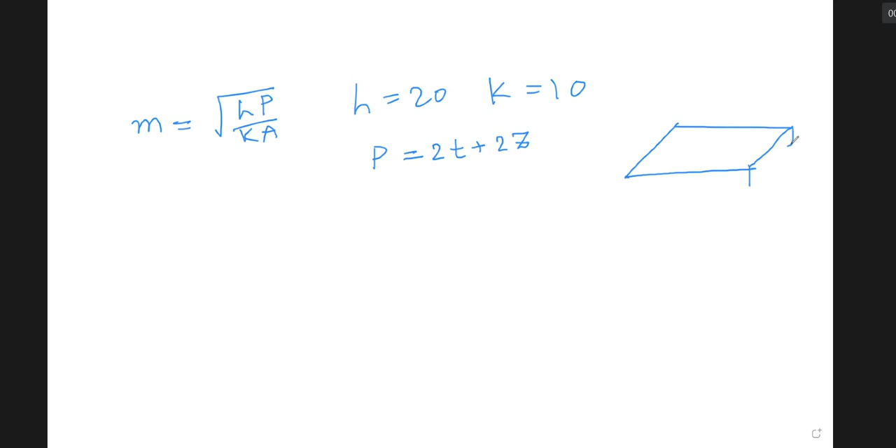The perimeter would be equal to, if you recall the geometry, twice the thickness plus twice the Z dimension. And in this case, our fin was like this. Okay, so that was the fin, and then that was the T, and that is it.

Okay, so this was our original fin, I think we had to go up like this, right? I think that's how it was. So that was your direction of X, and then this dimension was T. Okay, and this dimension was your Z.

So in your question it was said that here, per unit depth, so clearly you can take it to be 2 times thickness, which was 2 millimeter or something. So 2 times 0.002 plus 2 millimeter, 2 meter. So you can put it to be 2.004.

Okay, and what is the area? Area is basically this cross-sectional area. So if I can show you the area there, this is your area. So area is nothing but T times Z.

So you get... thickness is 2 millimeter. Oh sir, yes, X equals to... in meter, 5 millimeter. No, x equals to 5 millimeter, but we first want to find m, right? So we're converting everything to meters, let's write it in meters. So T is 0.002 meter? Yes, 2 millimeter, sorry, 2 millimeter. So that's 0.002 times 1. So this would be 0.002 times 1, that gives you 0.002 meter squared.

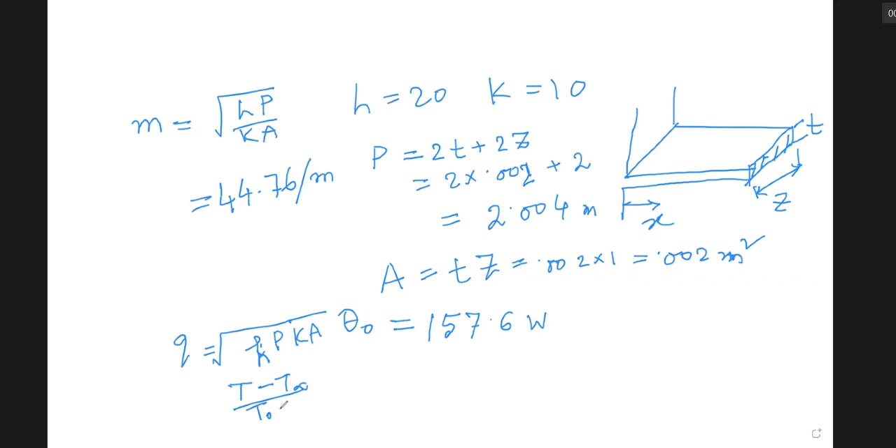Okay, so এইটুকু হচ্ছে হিট লস ফর দিস কেস। আমাদের আরেকটা জিনিস বের করতে হবে, সেটা হচ্ছে টেম্পারেচার। এবং আমরা জানি যে এই সিচুয়েশনের জন্য টেম্পারেচার ডিস্ট্রিবিউশন was T minus T infinity over T0 minus T infinity is e to the power minus x, mx।

Okay, so for x equals to 5 millimeter means 0.05 meter। Can you work out the value of the T, please?

42.77। I don't think so. It will be higher। Sorry, no, not 0.05. It should be 0.005, I'm sorry, because it's 5 millimeter।

Okay, 0.005। 0.005। 164.70. Yes,

164.7 degrees centigrade। তার মানে ঠিক এই জায়গাটাতে টেম্পারেচার ছিল 200, and just after 5 millimeter the temperature has gone down to 164.7, and then it will continue like this।

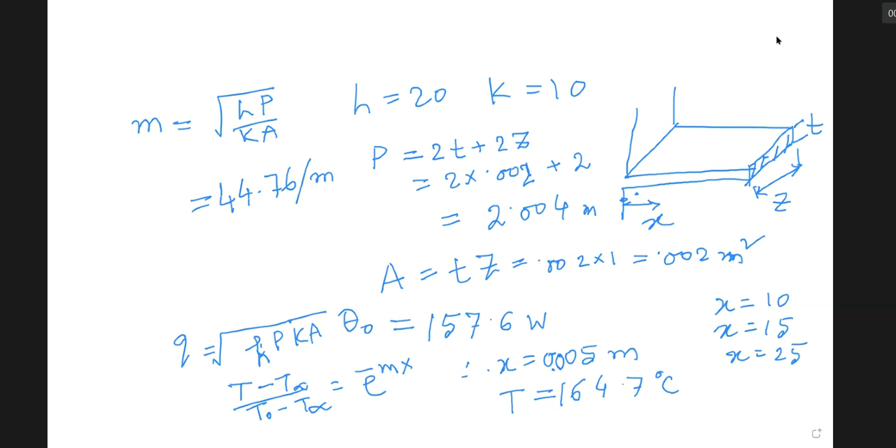এখন আমি এখানে যাচ্ছি। Okay, so I think if I share my screen now with you। I'm stuck with it। Okay, so if I go back to my screen, wherever I was, so this is where we are।

So we can now repeat the calculations। It's a little bit tedious, but certainly worth doing for case 1, case 2, and case 3 for few locations। And then if you plot all those calculations and put them on the same graph paper, তোমরা সবাই এক্সেলে গ্রাফ, মাল্টিপল গ্রাফ করতে পারো খুব সহজে?

শুনতে পাচ্ছ আমার কথা? হ্যাঁ, সো আমি তোমাদের সাজেস্ট করবো, যেহেতু স্প্রেডশিট আছে, তোমরা খুব সহজে এগুলো প্লট করতে পারবে ইউজিং দ্য স্প্রেডশিট and plot them on the same graph paper।

একসাথে যখন তোমরা প্লট করবে, then you will start to see the impact of different kinds of boundary conditions on the temperature distribution and the heat loss। বুঝতে পেরেছো? And if you do those things, you will get a real understanding of the meanings of the different boundary conditions, that why these things are happening, how it reflects with your physical phenomenon with the mathematics which is involved।